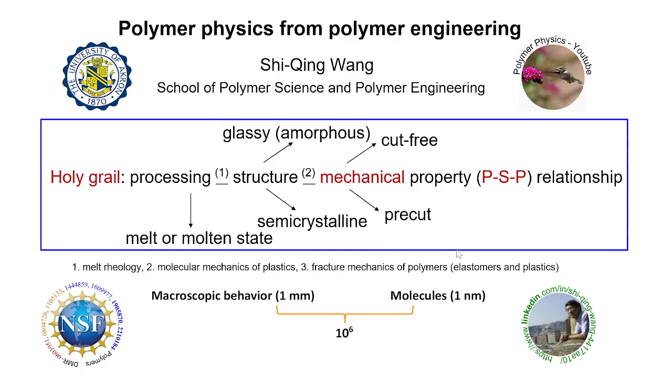Let me briefly introduce myself. We work on processing-structure-property relationships, digging out the physics to help us do better in engineering. I was lucky to work on rheology early on, to understand how we can manipulate structure and learn how ductility occurs. And I was always disappointed that I wasn't working on elastomers until about 5 years ago.

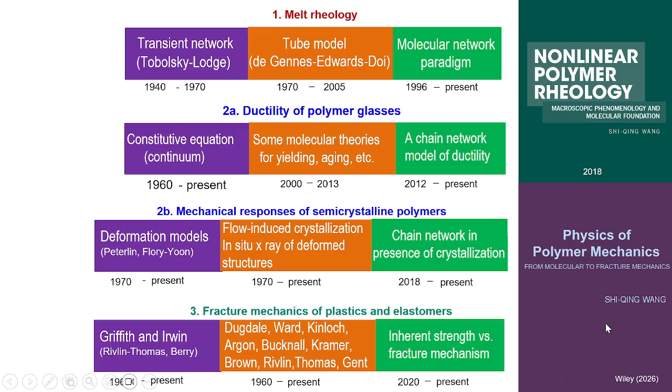We jumped into the field of fracture mechanics. This is really new for us, about 5 years old. We previously worked out how we should think differently about polymer rheology, and because of our progress on fracture mechanics, I'm writing my second book, which will essentially update many of the books that currently exist.

Very quickly, my universe is polymer physics, and there are 3 parts to it. On the rheology side, we ask some basic questions. Then we move on to the plastic state, where we also have an essential question to answer. Finally today, I'm going to share what we've been doing with the last topic, episode 3 on fracture. In particular, I'll talk about elastomeric fracture.

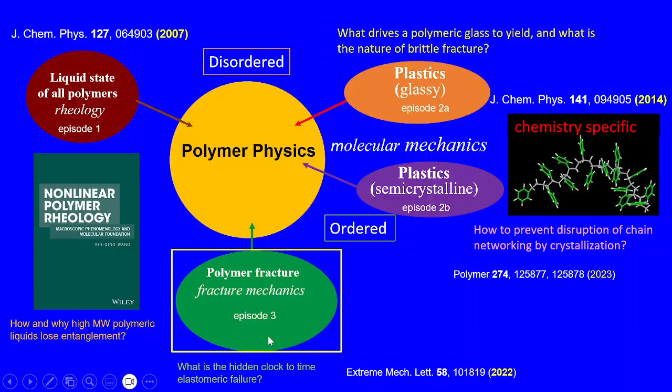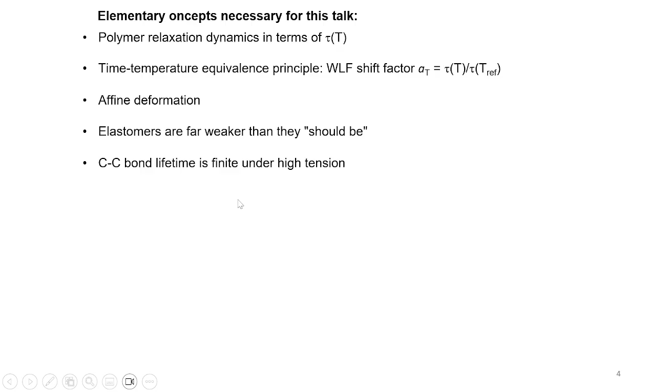But let me first review a few essential concepts. The last topic was about chemical bonds. If you look at the carbon-carbon bond, depending on the tension in the bond, there are certain lifetimes associated with it. For example, it will take 30,000 years if the tension in the bond is about 1.5 nanonewtons, so it's still too long for us.

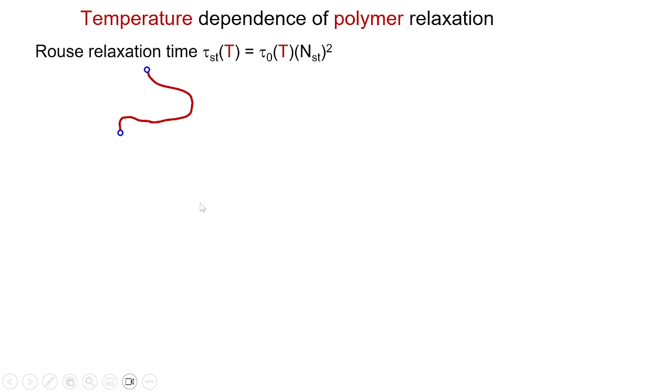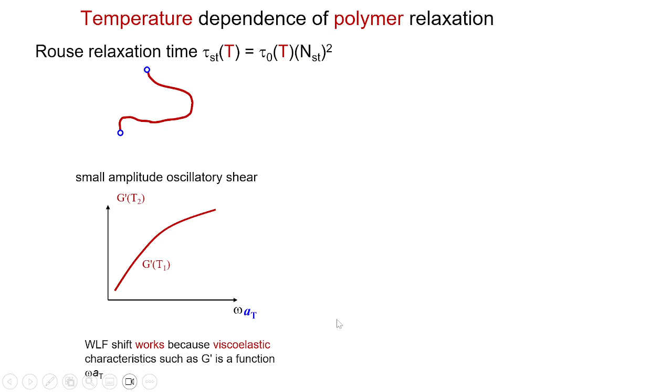Or rather, your wear problem involves higher tension, so it takes seconds or whatnot. In any case, we know what relaxation means, and we know how to think about its temperature dependence. For example, we can do oscillatory shear, make a measurement, do the shift, and realize how relaxation changes with temperature. That's something very elementary we know.

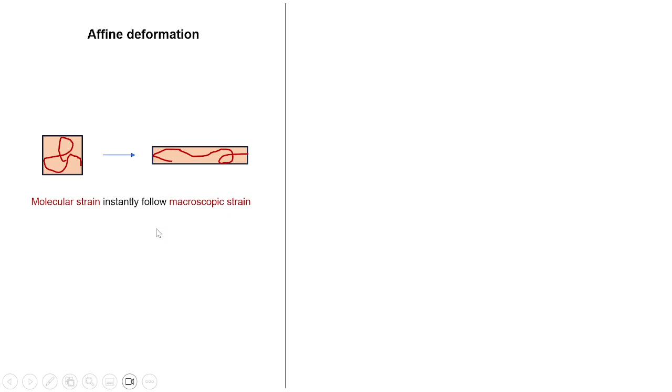I should mention we should believe that affine deformation in elastomers works very well, so molecular strain follows what you do externally or macroscopically. The bad news for all of us is you can estimate the theoretical strength of the elastomer and find it should be much stronger—about 100 times stronger than what you normally see in the lab.

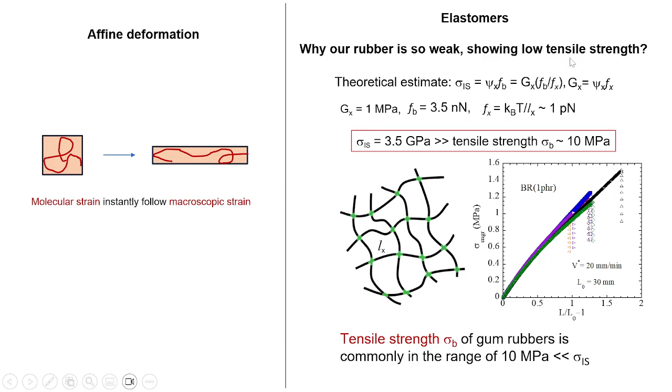That's a disappointment, and everyone is currently trying to figure out why this is the case. But that's reality, so the question is why it's so weak. Today I'm trying to give you a sense of what I'm trying to do in answering questions about the science behind fracture mechanics, what steps or missteps we've taken that we should recognize, and what would be good questions to ask in this area.

So here's the outline. I'll start with a gentle introduction to what fracture mechanics is. Once you know that, you'll probably know more than most people about this, because fracture mechanics is something I even shied away from 5 years ago. Then I'll briefly say a word about the essence of polymer fracture—2 slides. Interestingly, we have an old way of thinking about it, whereas the newer way is even older. It's a funny thing I want to emphasize.

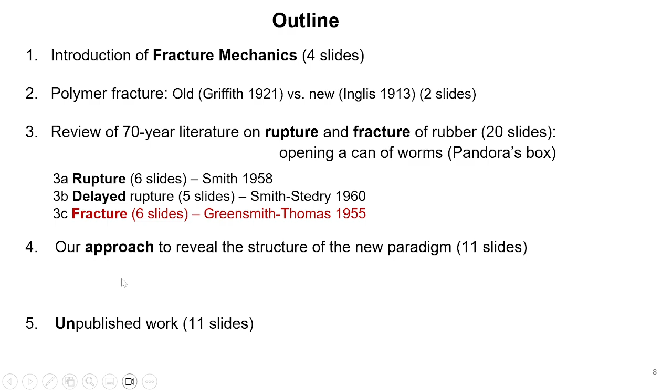Now I'll spend a lot of time reviewing what has been done in the last 70 years. There are 3 topics: rupture, delayed rupture, and fracture. Then I'll talk about our approach to it. In particular, our approach discovered that the toughness is largely determined by the strength you have in the system.

Moreover, there is a lifetime, an internal clock that governs this whole process, which has to do with the lifetime of your elastomers—how strong or how long your carbon-carbon bonds can survive under high stretching. That's a completely new concept, ignored in the past.

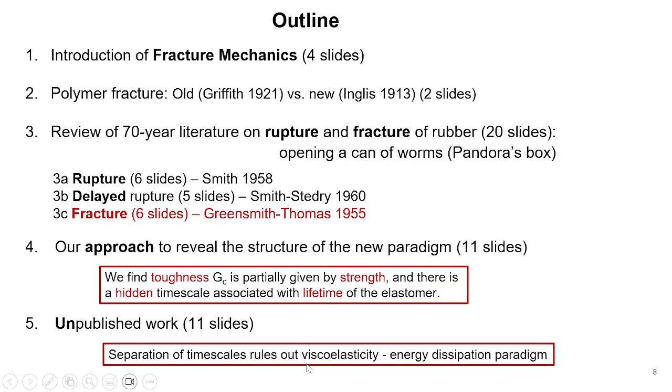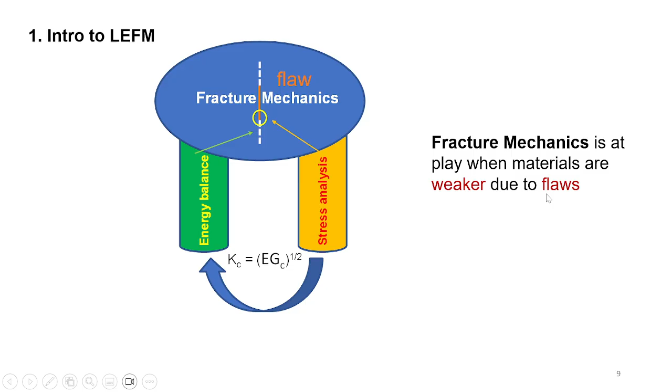And then lastly, if I have time, by looking at a variety of experiments, I'll show how we can go beyond the previous paradigm. In fracture mechanics, it turns out you worry about it only if there are flaws in your system. It all started long ago when we worried about window glass—we find window glass is so weak compared to what's theoretically possible.

And that bothers all of us—weak by 2 orders of magnitude. So fortunately, there are people who already started worrying about it.

If you dig a hole, a through-thickness hole in your material, you find the stress at the 2 corners, the tips, can be much higher than the remote load or overall load. So that's a good starting point, except if you look at it, when this hole or this flaw is infinitely sharp, the stress will be infinitely high at the tip, which is annoying.

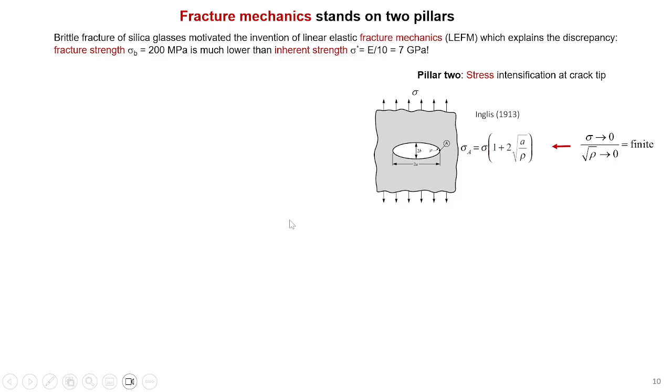And Griffith, for reasons I'd need to wake him up from the grave to ask—gee, why does that bother him? It really bothers him. So he decided to work on the effect of having the condition for a flaw that you can pretend exists by digging a hole, and under what condition this flaw will lead to crack growth.

So he worked out an energy argument to indicate that it happens when the so-called energy release rate is higher than surface tension. And there's more work on this side later on, when you consider a very sharp crack, you also find that the stress diverges as 1 over square root of R.

So as you approach the tip, it goes to infinity. And what regulates the strength is the so-called K, which depends on the so-called far field load.

So these are all simple mathematical results. What bothers them is the divergence. So Irwin comes in and says, oh no, no sample can go to infinity when the stress is infinite. Therefore, there must be some way to cut it off.

So I will not go into that detail, except you recognize there are 2 pillars. One is to emphasize the stress can build up through the far field load, K. The other one is the condition for the crack to occur, by looking at how the energy can accumulate and be released to pay for the surface tension you create.

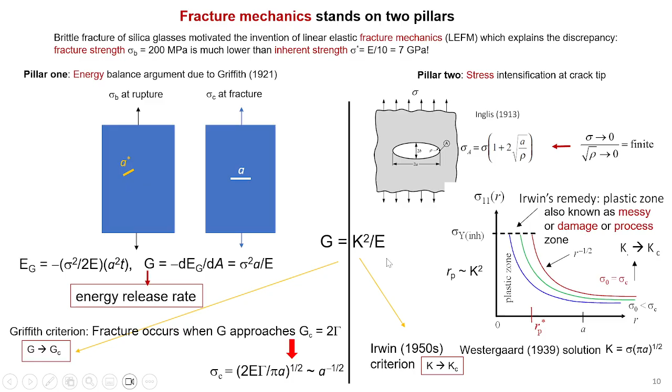I'm going to skip much of what I have to say here because I have very limited time. But basically, when you learn fracture mechanics, there are tons of questions that show up. I'm not even going to go through every one, except what I learned—I'm troubled by the fact that there seems to be a confusion about equating cause and effect. They are not equivalent, okay?

There are many other questions that I'm listing. The beauty of having a recording is, here it is—you can show it later if I don't have the time. But in any case, I was very bothered by this.

I just showed you the 2 pillars. There is a sense that these 2 pillars are equivalent. But from day one, the way I read it, they are not equivalent—they are causally related. The stress is determining everything that's happening. This energy is what is associated with the stress.

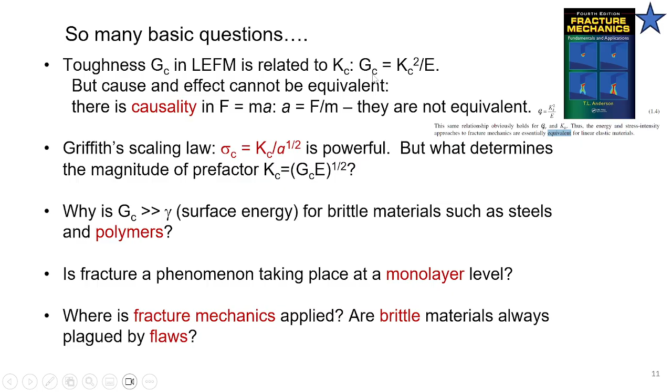So let's take the most remarkable case. When you have a sample that you know has no flaw in it, it turns out you just need to describe its tensile strength and how much you can stretch it.

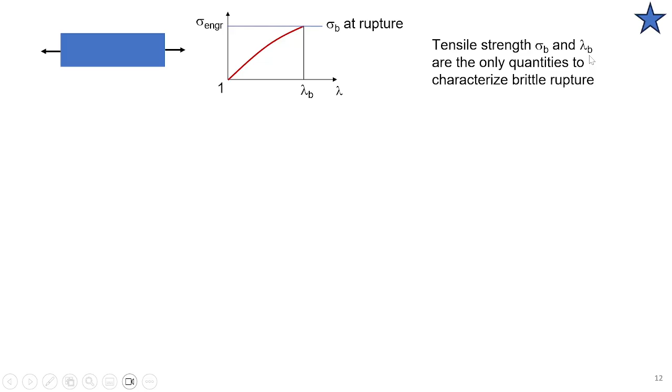But that's not how we think about rubber for the last 70 years. We thought rubber is weaker—remember I said it's weaker by 2 orders of magnitude. One of the things in our mind is it's weaker because there are flaws. But if there are flaws, then indeed it's not sufficient to just characterize your material in terms of stress, and you have to introduce a length scale, okay?

And that's what Griffith did. So Griffith's discovery of the energy release rate precisely says there is a quantity that controls fracture, and it involves both the strength and the size of the crack.

So 100 years of practice is: we suspect there's a flaw. Well, if there's a flaw—and I don't know the size of it—why don't I just do one where I know the size, and learn what the flaw is doing? And then you feed that back to the system.

The problem I learned again 5 years ago about this fracture mechanics is Griffith was able to tell you, hey, I can tell you what happens when fracture occurs. It occurs when this number reaches some value, which implies that the critical stress is—if this is a constant—then you flip it, it's 1 over square root of A.

I call this an operational definition. This formula does not give us any sense about the magnitude of GC.

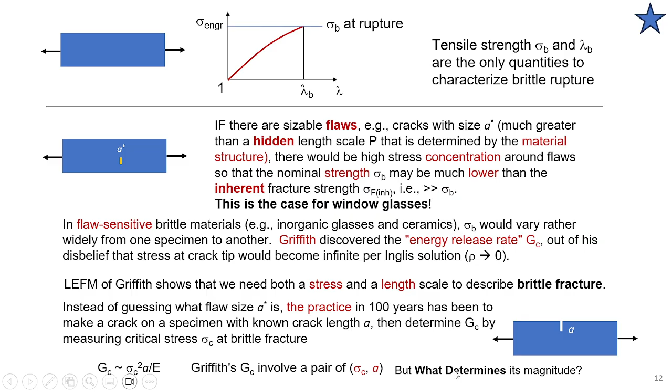Let me briefly review what happens with fracture of polymers. We suspect our polymer is flawed. As anyone doing fracture mechanics would, we make a cut and examine at what stress the crack will propagate. Indeed, you'll find the stress needed for propagation depends on the crack size—it's 1 over A square root.

If you make a plot, you find that using a larger crack causes propagation to occur at a lower load. People were patient enough to use smaller and smaller cuts, and eventually found a value where, once the cut is small enough, the material is as strong as without any intentional cut.

If you are patient, you'll realize that as my equation on the left goes to the minimum cut size, it becomes the tensile strength. If you work out the detail, you'll find this means I can write Kc in a different way.

In the textbook, if you analyze this simple math, you'd conclude the reason there's a minimum cut size is because it matches the flaw size. But it turns out that conclusion is highly problematic—the meaning of this minimum cut size has a different origin.

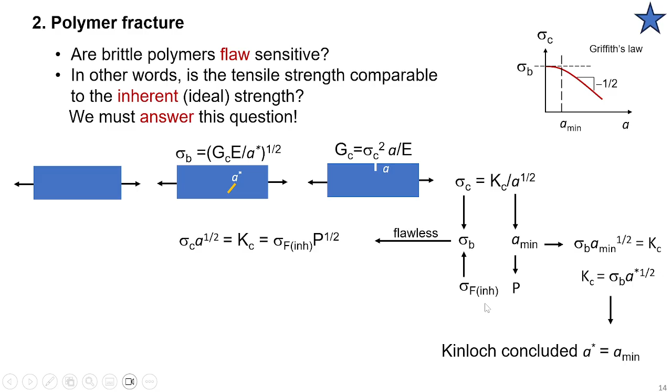I'm trying not to go into details, but there's later analysis you can look at. You'll find that the existence of this minimum size is actually related to how sharp that crack is.

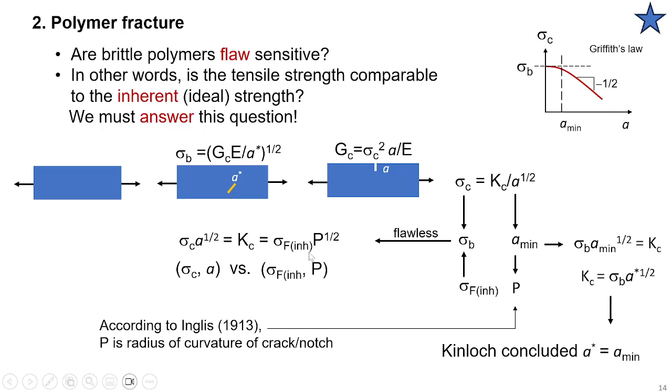If you do that, you can start to answer the question. Kc, in the operational way, you don't know its magnitude. But through this analysis, you find Kc is actually determined by the strength of the material and the sharpness of the crack.

I would probably skip most of it. This is why I said in earlier days, we know this insight much better than Griffith was able to. If you've spent enough time on this simple solution, you imagine keeping loading the sample until the tip reaches the strength—that's when breaking occurs.

On the left, you'll find a relationship between Kc and the strength of the material. So what we tried to achieve, and did achieve in the last few years, is discovering that Kc and Gc—operational definitions that are useless for teaching us their magnitude—actually have an alternative expression in terms of material properties: the strength of your rubber, and how sharp the crack naturally evolved to be.

Let me now quickly, with that background—I know it's still rather abstract—jump to the third topic: reviewing the literature. The literature is very rich, 70 years of continuous research, since the 1950s.

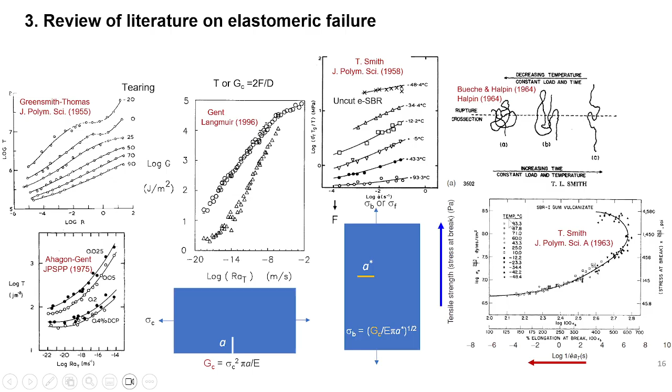Similarly, you find the tensile strength grows with rate and grows as you go to lower temperature. There's a whole set of data, which I'll go into more detail on later. People even made a master curve—this plot shows strength as a function of 1 over the rate, so the higher the rate, the higher the strength. There were some early explanations for this, which I'll criticize. In any case, there were data showing this, and they even made a 3-dimensional plot showing temperature dependence and rate dependence.

Let me go into more detail and talk about this topic that most fracture mechanics people avoid, which is rupture without a cut. If you don't have a cut, that's not a fracture mechanical setup anymore, except they blame everything in terms of mechanical response on fracture mechanics, because they visualize flaws in the system.

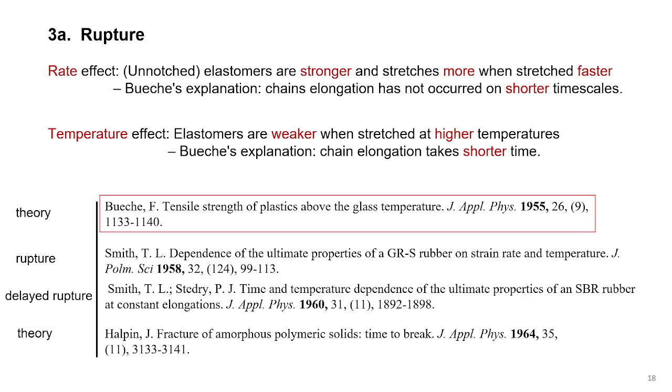Let me tell you what intrigued me, which has been known for almost 70 years. If you stretch faster, the rupture will occur at higher strength and higher tensile strain. If you go to lower temperature, you'll find your material is stronger. These are the two effects I verbalized, and there were even some theories trying to explain that, which I will criticize soon. These are the key papers, from 1958 and 1960.

Here's the actual data, just showing what I told you. You can imagine a rupture problem. It was known since the 1960s that if you use a low rate, it will rupture here; higher rate, rupture here; even higher rate, ruptures there. If you plot these three points as a function of rate, you get this line.

The higher the rate, the stronger it is. And the lower the temperature, the stronger it gets. So this is a lower temperature, this is a higher temperature. This has been known for nearly 70 years.

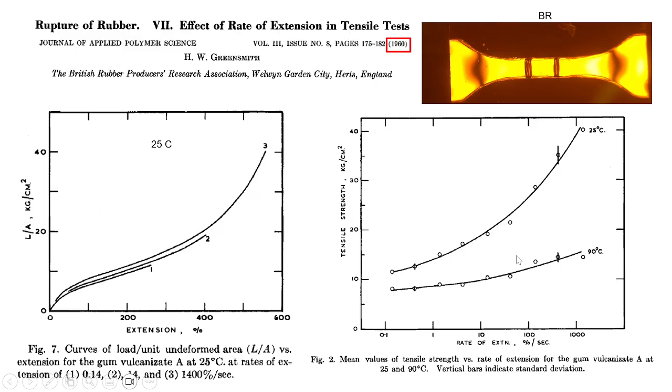How to explain it? I'll give you two literature explanations. The first one is due to Bueche and Halpin. Bueche was a very famous professor, eventually at Akron. He was confused about what a creep experiment was teaching him.

Basically, he grabbed a piece of sample, used constant force, and found that given enough time it creeped to a point and then rupture occurred. I replotted his data here. From that he concluded something completely erroneous: he says, oh, I understand what the rate effect is — if you use a higher rate, the time you use is so little that the chain has no time to become elongated yet.

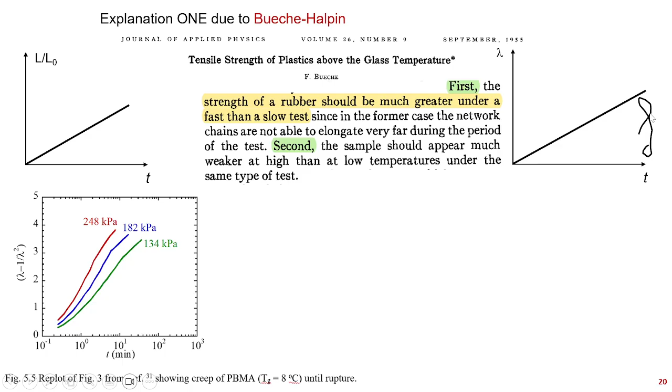So let me teach you how this goes. Imagine I'm doing macroscopic stretching on this side — this is your molecular strain. I'm just talking about affine deformation. As I stretch to this point, my molecules get stretched this much. If I use a higher rate, he basically says it takes less time, so my chains are not as stretched yet — you need to wait to get stretched.

So therefore, you can essentially avoid being broken, because at that time the stretching hasn't occurred yet — sufficient stretching hasn't occurred yet. This is his explanation for why higher rate is stronger: at higher rate, relative to a lower rate, you haven't spent enough time, and therefore the chain hasn't stretched.

This goes along with further papers claiming — which is the key mistake we accepted for 70 years — that your rubber spends most of the time reaching the critical molecular strain, and spends very little time at the critical strain for chain scission to occur. That's the claim.

That claim, of course, completely violates the reality of affine deformation, which is why I reviewed for you what affine deformation is. Your experiment was not a creep experiment — you do a displacement experiment. Once you reach that strain, you already have that molecular strain.

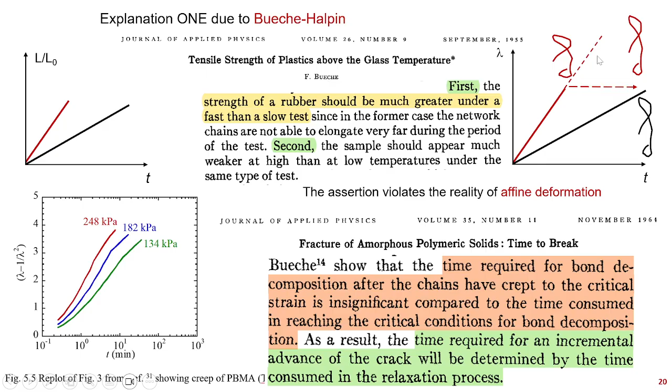Let me give you the second explanation. This problem, seemingly non-fracture-mechanical, is treated as a fracture mechanical problem because there's a flaw in there. So they try to explain this rate dependence through a separate experiment with a cut, where you learn about the relationship between energy release rate and the rate of crack propagation. I won't go much further, except to say this is really too difficult, because there's no relationship between the crack propagation of a pre-notched sample and the rate used to stretch an unnotched sample.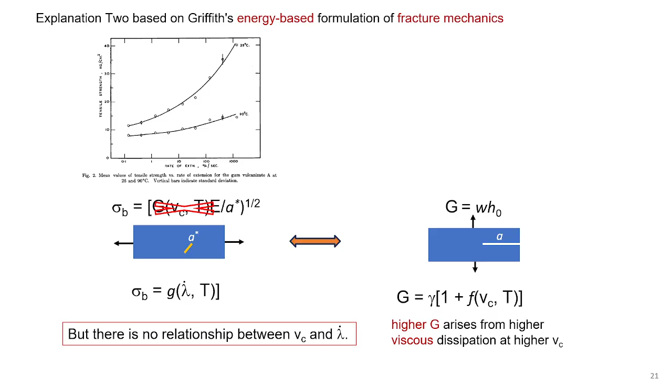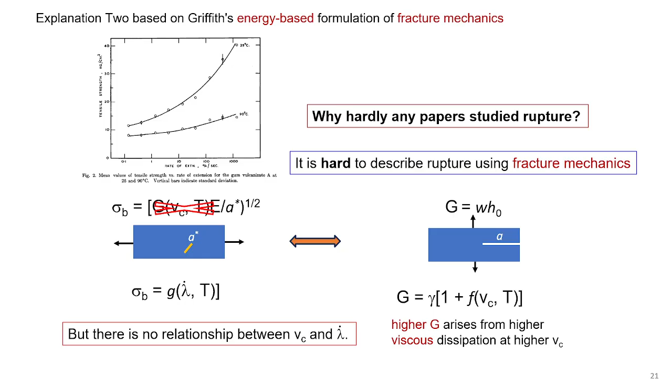So this is a good reason why hardly any papers study rupture — we really run into this difficulty. In fact, I probe my colleagues all the time, I force them to explain rupture, and they really give up, saying 'I'm not touching rupture.' Rupture is difficult to deal with, and in my view it's clear that it's really difficult to use fracture mechanics to describe rupture.

Further, it turns out people collected lots of this data — I'm re-showing it here — and they find the strength changes with rate, and at different temperatures it gets stronger.

And they said, oh, that's in the 50s. WLF was just discovered, so let's do a temperature superposition. Let's shift them. They find if you use WLF, you get a curve almost like a master curve. That's published in all the literature.

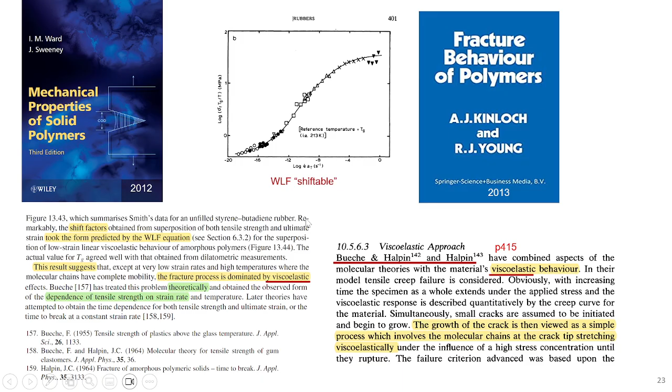Except if you look a little carefully, if you try to really produce a master curve, you find you need a shift that's different than WLF. That's the red shift. It gives you a much better master curve, and it suggests that the temperature dependence is rather different than WLF. So I'm just trying to show you that the whole literature talks about rupture in terms of temperature dependence through WLF.

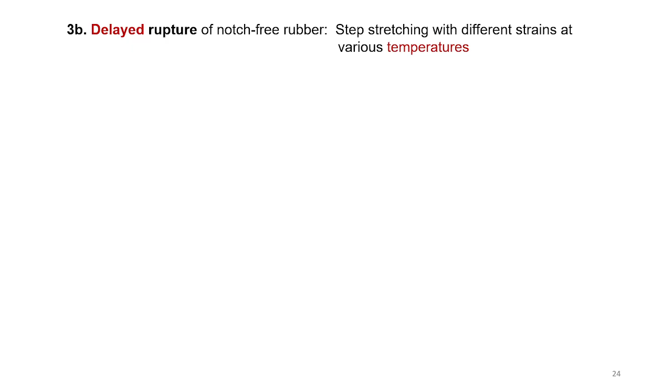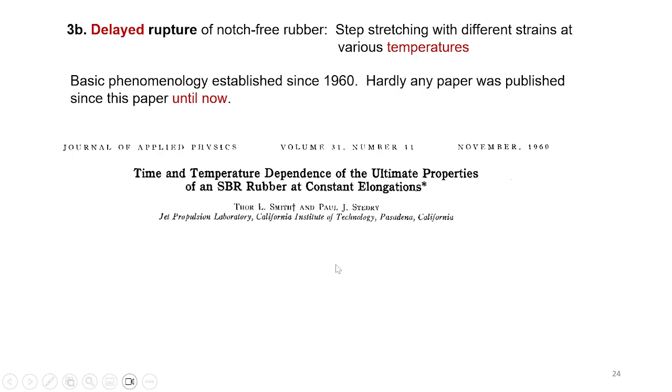The most important experiment, in my opinion, is this delayed rupture experiment. The same Smith did this, and it was hardly ever repeated. Nobody ever paid attention to this experiment. I want to say, to the degree that this book does not even cite this paper, it's pretty remarkable. So let me try to say what that experiment was, published in 1960.

You stretch a rubber to a certain degree, you hold, and wait. Lo and behold, it will break. You stretch it a little more and hold, it takes less time to break. You stretch it the same degree, but at a lower temperature, and it takes longer time to break. So he did all sets of the state, okay?

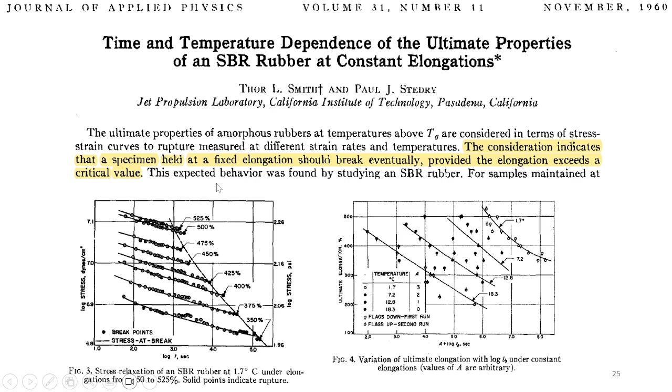And he even remarkably anticipated this result after he had done the continuous experiment. So I scratch my head, really trying to get into his mind about how he even could anticipate that holding a stretched piece of rubber would make it break.

And the explanation is the same. You stretch it. If you do a so-called delayed rupture, which usually means you stretch very fast and hold it. After you stretch it, you hold it. There's no further deformation. Nothing further going on. This is the most beautiful experiment because there's no ongoing deformation.

And then if you wait enough time, he waited as long as 7 days. If you don't stretch enough, well, he was very patient, a patient man. So it could be seconds or could be 7 days, depending on how much you stretch and hold, and depending on temperature as well.

So the idea I'm putting into his mouth: if you stretch, the black line is the continuous stretching, until at some point it stretches there and breaks. If you all of a sudden stretch to the same level, his idea is the chain hasn't reached the critical strain, so it will take time to elongate, and you wait until it elongates. Because most of the time was consumed elongating, reaching the molecular strength, rather than waiting for the bond to break. So my view is exactly the opposite.

That's why he thinks this way, so look, this is written in the paper. I'll paraphrase it: basically it says the system takes most of the time trying to get molecularly stretched, rather than taking time at that stretching to break. And I have evidence to prove exactly the opposite.

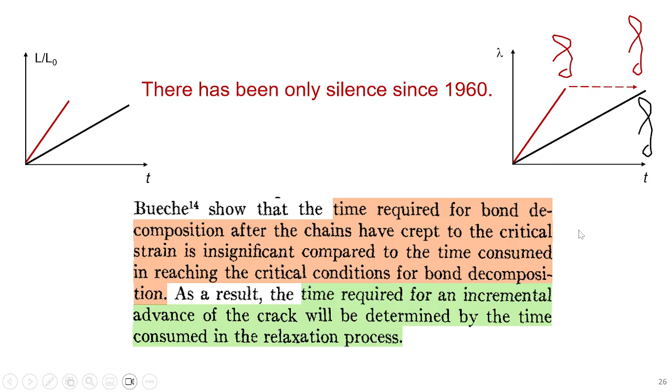So this is really beyond me. No paper ever repeated this. How to comprehend this? Maybe they didn't figure out this is the reason. In any case, the same paper speaks about nothing else. The last point says the temperature-dependent rupture has no significance. Basically, they are aware the chain can break, except they are also insisting that chain breaking is not the dictating process. The system is mostly spending time reaching the stretching, which is a big violation of what affine deformation is, which actually is quite accurate.

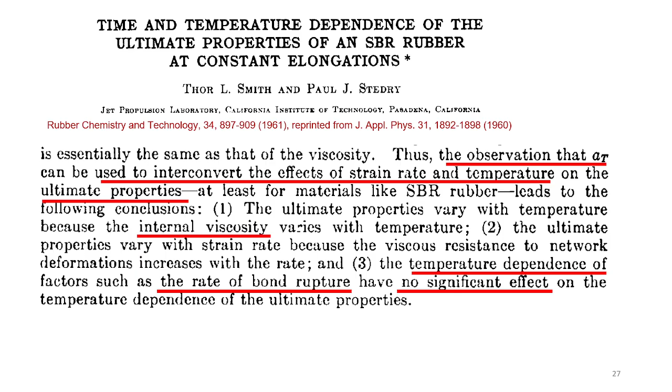I will have experimental proof for you. In any case, this is the same paper. He did it for different temperatures, so he could claim there is a temperature dependence of this phenomenon. For example, at lower temperature, it takes longer time because polymer relaxation is longer. So WLF will give you that fit. He fit them, this is the fit. And look, oh, reasonably it fits quite well.

What I mean is the fit, the red is the WLF fit, and the symbols are the data. Except if you properly shift this data vertically, you find they systematically deviate. So let me repeat, it's the same data. You just need to look at them, and then you realize something is wrong.

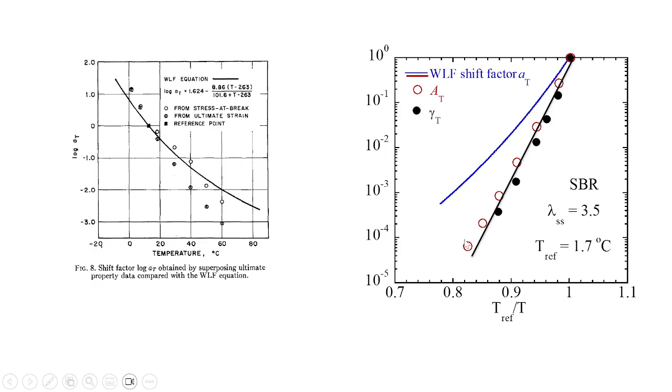Now let me talk about the third one. Now it comes to the world of fracture, which usually you mimic that process by doing a tear experiment. The tearing experiment really obscures causality. People thought that how much force is arising is produced by how fast you stretch.

Same thing, it turns out the higher the rate you stretch, the faster the resistance. We can talk privately, but this is a big deal that I claim this experiment was confusing the causality.

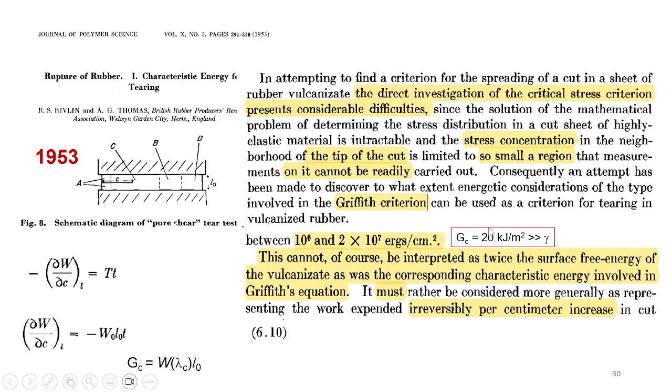So I can review for you in the beginning, that's the first paper. Rivlin teaches us that we should use a pure shear, except they find that this energy release rate is much higher than surface fracture energy. I'm just flashing this result again and again, showing you that the so-called energy release rate is higher as you tear faster, and higher as you go to lower temperature.

All this is summarized in terms of this expression, suggesting there is an additional contribution coming from tearing faster. Because this G is much higher than gamma, this second term is much larger, which is monotonically changing with the rate, and follows WLF. So this suggests that this is all viscoelastic and viscous dissipation, in fact.

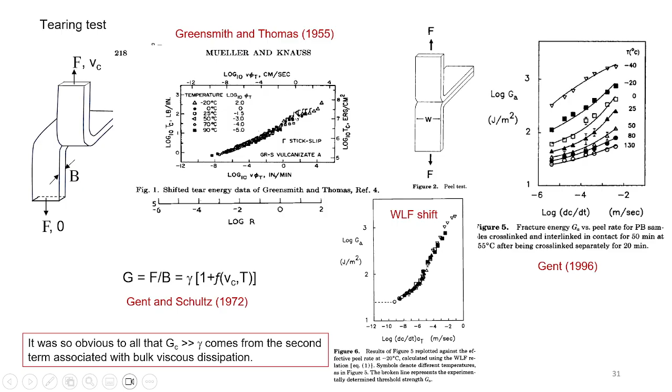So this is the WLF shift here. There's just tons of work like this. So this is the shift—they shift it and get this so-called quasi-master curve through WLF.

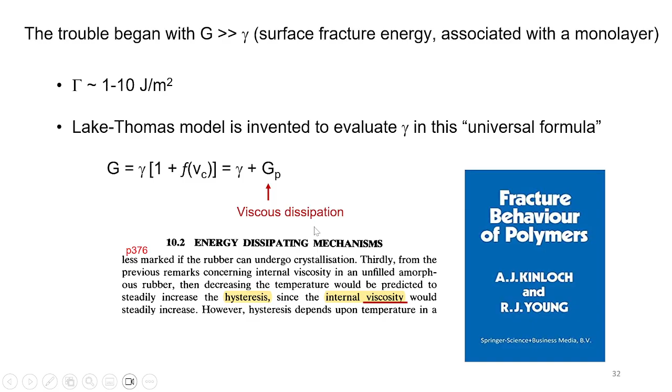And therefore, its origin is viscous dissipation. So that's the current paradigm, reviewed and discussed in our textbooks.

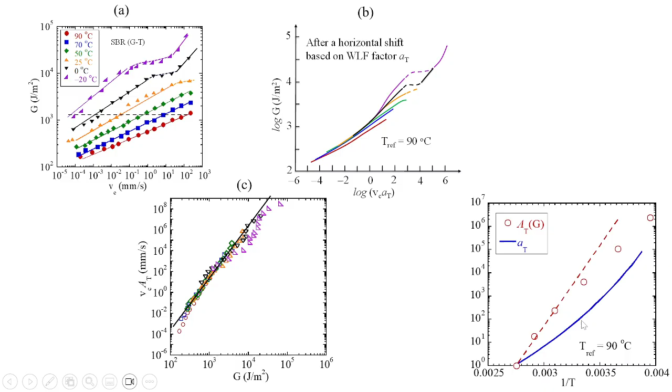So you can look at this a little closer, the very same data. You do WLF shift, that's how you get it. But if you do it a little more carefully, as I did, you find the shift is the circles and WLF is the blue line. They are not the same.

That was just a minor point for me. Is this for a filled rubber or unfilled? Everything I say is gum rubber, so it's all unfilled at this point.

In fact, there are theoretical attempts trying to compute what this term is by relating it to the rate of crack propagation. Since you have to think about dissipation, you need to convert this velocity into a rate. In converting that, you must introduce a length scale. The only length scale they can introduce is an unphysically small one.

But people are happy, you can fit the data. So they imagine that this crack propagation involves a length scale of 15 nanometers.

Okay, so let me summarize now. One more time: we blame this so-called crack speed dependent term on viscous contributions.

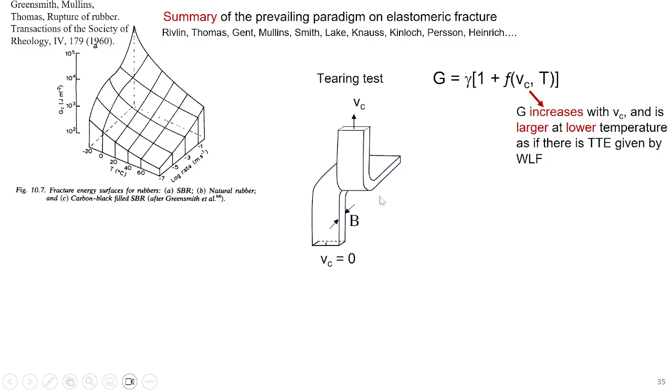As I said, people even computed how this term depends on the rate by assuming a certain unknown length scale. That's the paper by someone named Knauss, from Caltech.

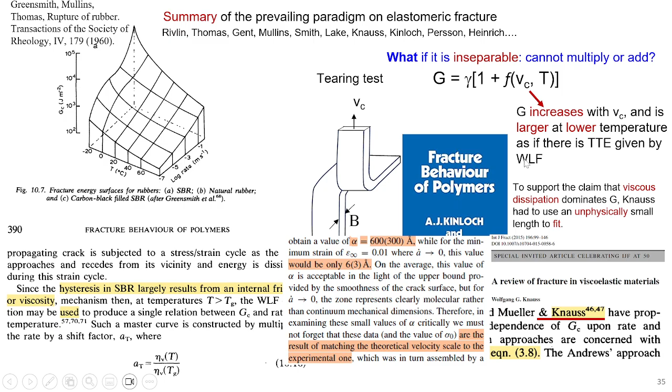The question really is, what if your physics is such that you cannot write anything in a separable way—you cannot multiply, you cannot add? In any case, this is my last slide about how they concluded.

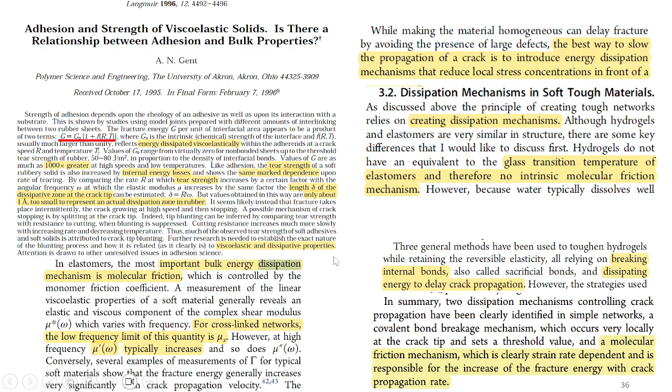Same thing, 1 angstrom is involved, and this is all in the framework of calling this energy dissipation. Okay, so that's it. Now comes to what we look at, how we look at it.

I have 10 minutes, that's enough, because lots of things are in our publications that I will mention. So basically, do we have flaws? We can—this is the same.

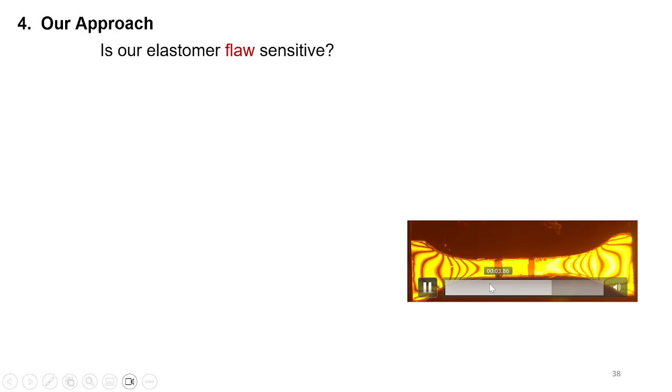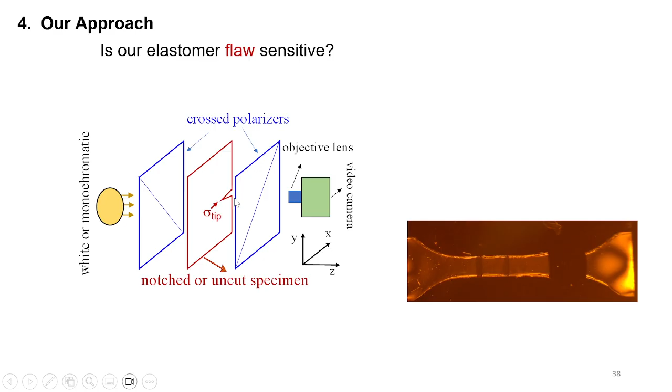So basically, do we have flaws, and how do we know we have a flaw or not? We decided to look at the tip directly, look at the stress at the tip, and even compare that stress at the tip with the tensile strength. Through that, we can learn about whether flaw is really the problem.

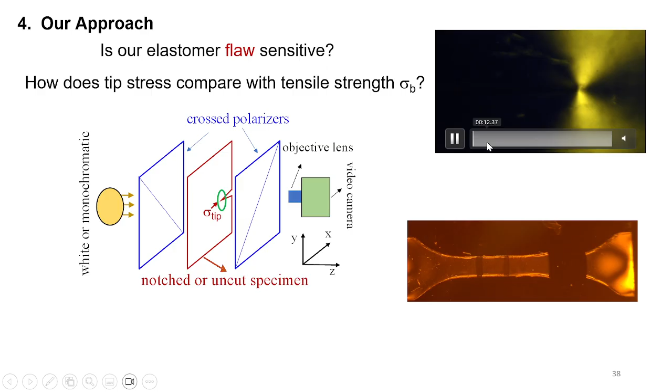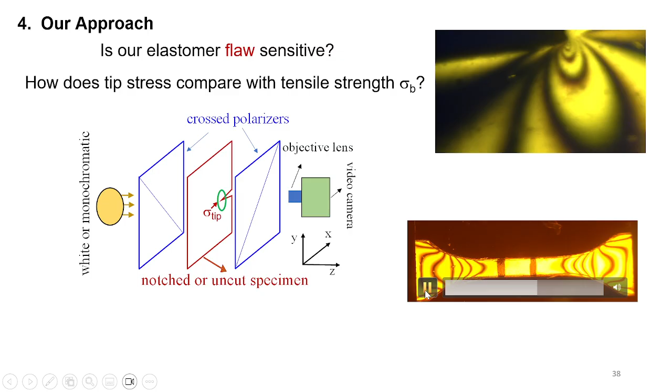Here is one where we intentionally make a flaw and stretch it. It turns out you can patiently analyze this movie and find out, through birefringence, what is the state of stress at the tip. And start to ask the question of why, at the higher load, the crack speed is higher.

Some of the details are already published in this paper. Basically, one of the beginning efforts I had was to clarify the meaning of the Rivlin-Thomas experiment. What they find is they do a pure shear test, and they find that independent of height, the crack will start to propagate at the same G, which has the implication this is all a beautiful energy argument.

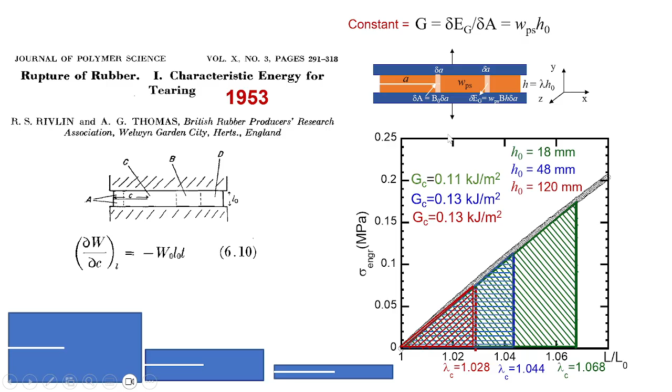I had a different insight. I judged that this occurred because when the crack occurs, the tip has reached the same stress, overcoming the strength of the material. So it turns out we can repeat this experiment using 3 different heights. We find indeed what you're supposed to see: if you load your sample with different heights to the same overall load, the tip is much more intensified when the sample is taller.

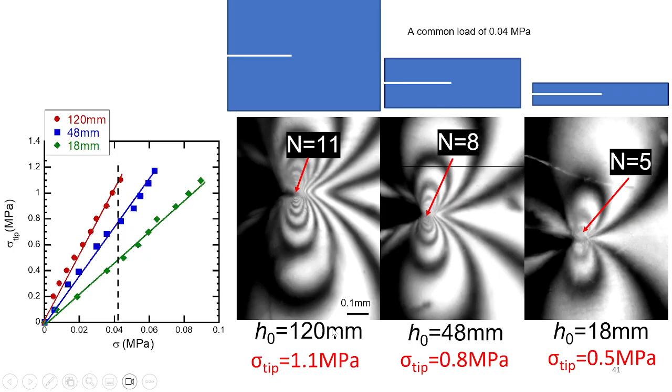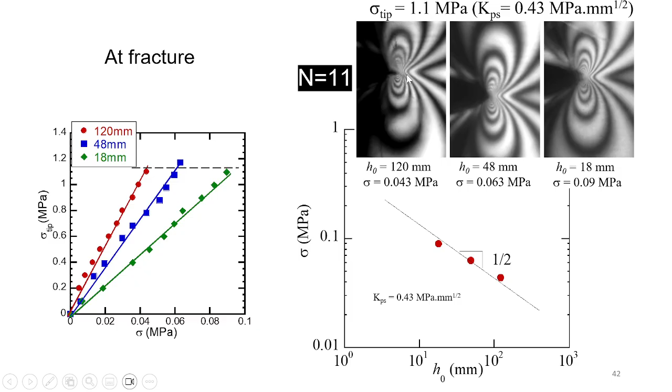Similarly, if you look at where crack propagation occurs, you find that's independent of the H you used. In other words, the higher H, it involves a smaller load. At crack propagation, the tip stress condition is the same, indicating all this is about how the stress is dictating the breakup of the network at the tip, rather than an energy argument.

The most remarkable thing out of this was you are able to find that the tip stress grows linearly with this parameter called K that I introduced initially, which basically is the far field load. So this linearity tells us the tip stress just linearly grows with far field load.

In fact, you can look at the point where crack propagation occurs and find that that point, if you regard it as the material property, this linearity actually naturally produces a length scale, which is the material property related to how the stress intensifies at the crack tip.

Through this exercise, we learned that previously we only knew K is determined operationally. Now we learned the magnitude comes from the material property, so you have a pair of quantities different from what we knew before. This is why I said from the beginning that the strength is determining your resistance to crack propagation. This is the beautiful result showing you can replace this operational definition with more insightful information about how it depends on the material properties.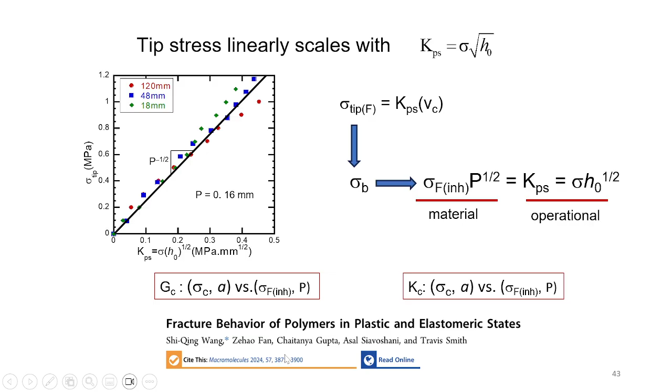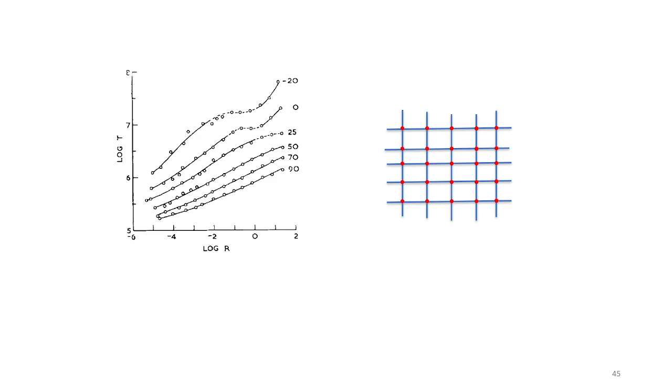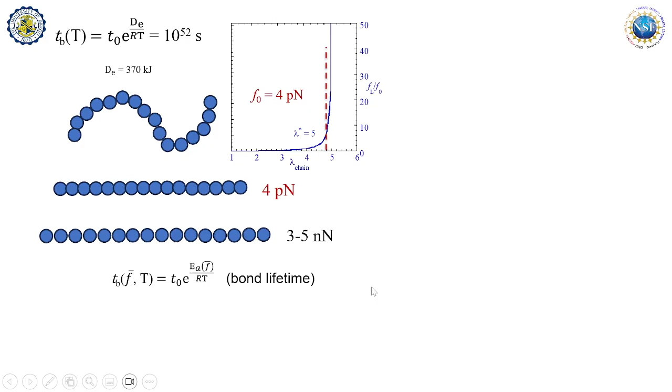In any case, I think there's without question that the problem of fracture is a transition problem. I'm going to flash through this very quickly. When the chain is stretched, you can build force, more and more force. If you don't build any force, the bond can survive longer than the known age of the universe - that's textbook. So you build enough force, and this density functional calculation shows that the lifetime of the bond just crashes down as more tension is built in the bond.

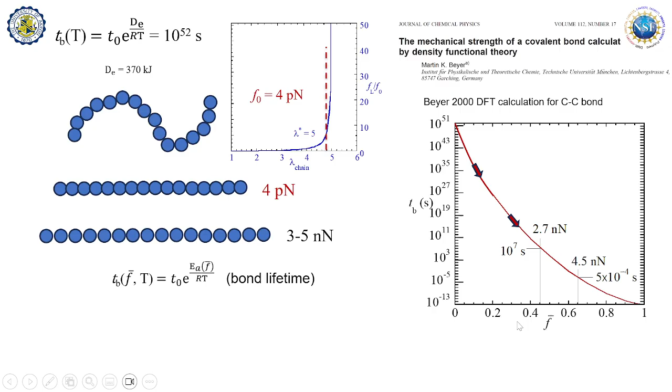Through that insight, I can build a theory that stretching is about lifetime. Your material's lifetime shortens as you stretch more and more, until that time meets the experimental time you've already spent - boom, break occurs. Through that, I could build a theoretical calculation showing how rate dependence and temperature dependence take place.

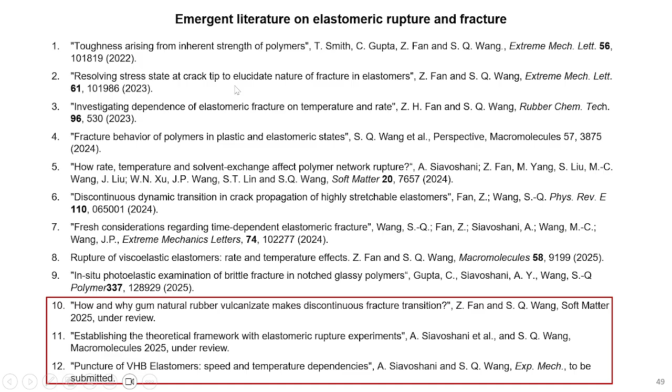So these are the papers so far, and we're writing more - these three are unpublished. If I have a few minutes, I'll show you these unpublished results, none of which have been published. I'll show you that one of the big confusions is about the rate - I'll show you evidence against Bueche and Halpin twice.

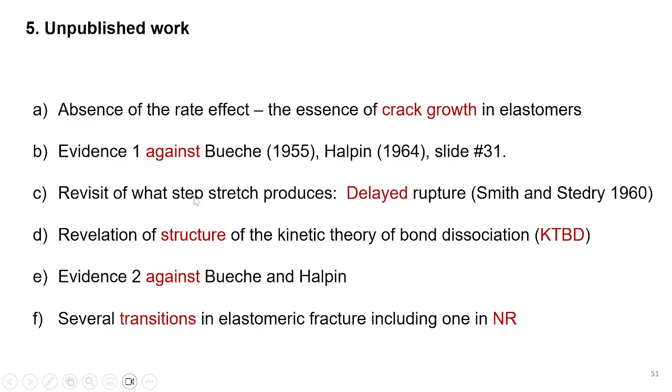One of the confusions in the literature is that they really conflated cause and effect. The tearing experiment was misinforming you about the relationship between G and Vc - G is the load, Vc is how fast you propagate. This plot should never have been plotted this way; you should always plot Vc versus G. In other words, it's the load that's determining the bond tension, and the bond tension determines the lifetime of the bond, and therefore the lifetime of the elastomer.

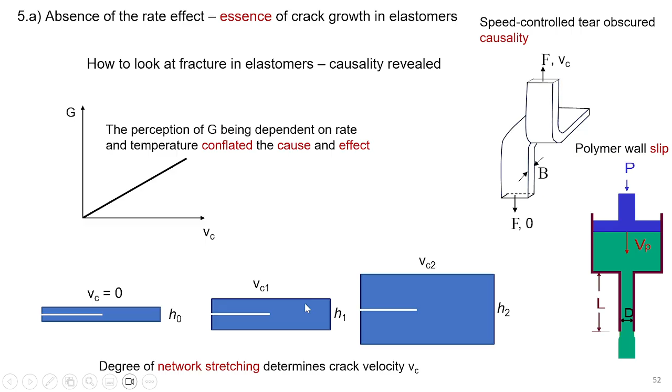So you can prove that. You can do this by simply loading them to different levels and watching the speed of the crack change with the load. This actually is a beautiful experiment.

We used 4 different rates to stretch this pure shear experiment - lowest rate versus highest rate. In the region where they reach the same strain, the speed is the same. In other words, the speed of the crack is only determined by how much you have stretched. The rate is a variable that just tells you how quickly you get there.

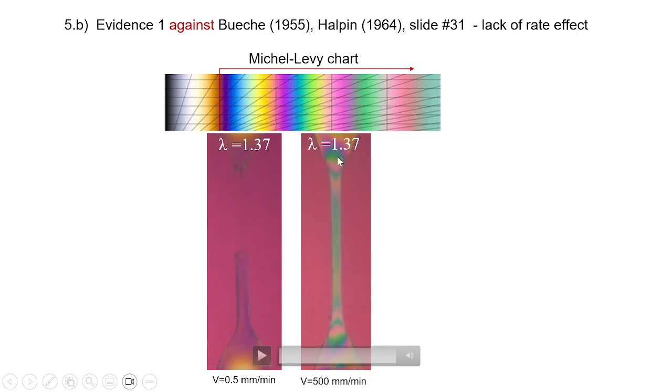So details aside, I guess I've given you the sense. Let's talk about the evidence. This is a movie taken to show the sample being stretched at two very different rates to the same level. The first one stretched slowly, it broke. The second one, because you haven't spent enough time, your network hasn't expired yet, so you can stretch more.

And this is the actual result, using 4 different rates. If you look at stretching to 1.37 for the 4 rates, they all reach the same level of birefringence, indicating the molecular strain has all been reached instantaneously because it's affine deformation.

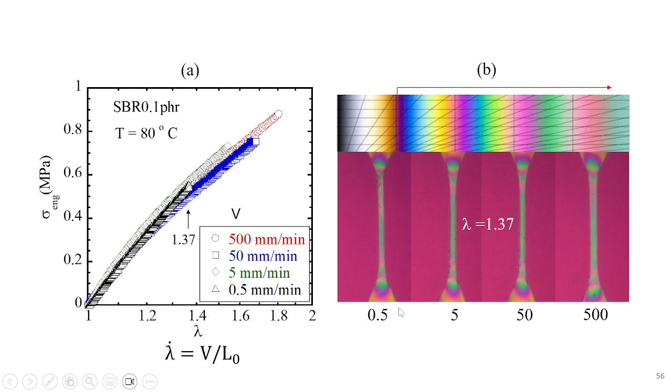And we repeat for the first time the result of Smith and Stedry about how you stretch to the same level at different strands and wait for the delayed rupture, how the temperature dependence occurs, and the dependence is very different than the WLF. This is a paper just being submitted.

So one of the last ones is to show once again this beautiful result of what is the essence of the delayed rupture. On the left, we have a continuous stretching. Let me do it one more time. On the left, we have the continuous stretching.

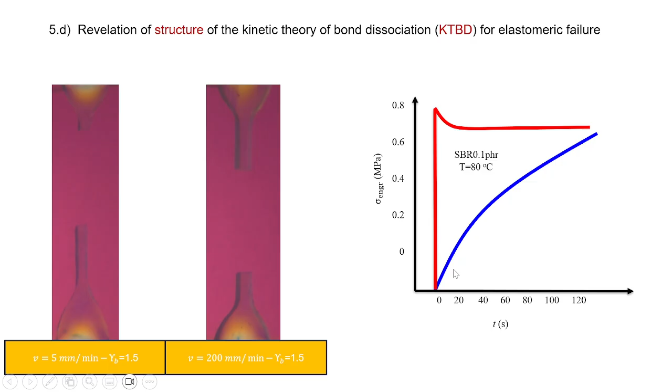That's the red. And on the right is the step strain that we did. And then the system just waits until the network expires, in the red. Whereas the continuous stretching was so slow, you already eat up all the time. And so by the time you reach the expiration, they all expired at about 100 seconds. So that actually tells you the structure of my theory.

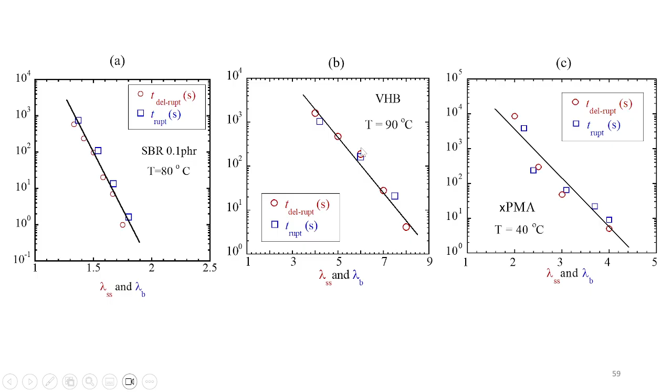I'm not going into details, but basically you can do this for different rates and find the time scale revealed by step strain waiting versus the time consumed or elapsed during continuous stretching. And similarly, the system spent most of its time just waiting for the bond to break. There's no change in the molecular strain through birefringence that we can measure.

So one of the key conclusions is the separation of time scales. In our theory, it's clear most of the time is consumed by the system waiting for the chain to break, rather than spending time to reach the molecular strain. So that's one of the key results. I wish I had more time, but I'm running out of time.

There were a couple of fascinating transitions, one of which deals with natural rubber. Natural rubber is known for a long, long time. When you change the cut size just by a few percent, it will change the strength of, or your resistance to crack propagation, in the language of energy release rate, by a lot.

So this is data. For several different rates that you did this. This is a pre-cut, and then you basically imagine using a cut size just here or just here. It sharply becomes stronger when the cut size is only a few percent smaller. And this can never be explained otherwise, and it's sharp. The sharpness - people don't ask the question of why it's so sharp.

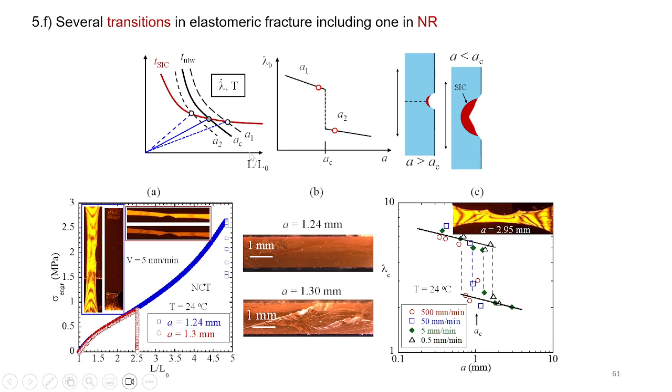And the whole explanation now finds the answer in our theory. The theory has to do with, of course, strain-induced crystallization. That takes time, and that process is competing with the lifetime of the network. So depending on whether there is a chance - the reason you are weak is because the network breaks down before the strain-induced crystallization can take place. And it occurs over a very sharp region, and I plot it here to indicate why it's so sharp, because the two meet in one place only.

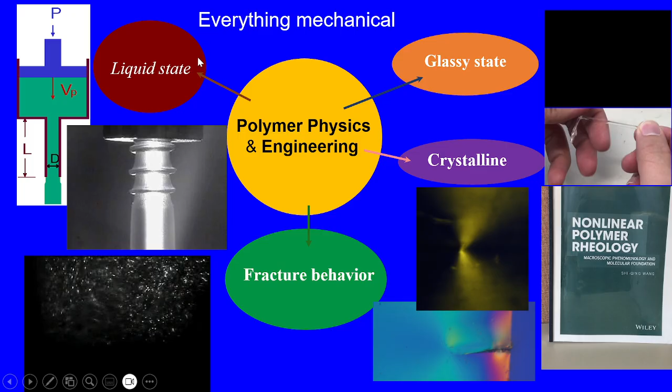So with that, I conclude. I think I'm doing okay with time, but this is the first time I'm reading my conclusions. I think it's very important to realize that this is about what happened - this is about separating of time scales, and most of the time is spent waiting for the bond to break.

And there is a lot more insight one can have by looking at the Inglis solution. And now we understand not only why Gc is constant, but we also understand what determines its magnitude. So finally, I want to say that the timekeeper in your elastomer is this network lifetime through bond breaking, not polymer relaxation time. So indeed, there were two relaxation times, two time scales, except for 70 years we've mistaken the time scale to be that of polymer relaxation rather than this lifetime through bond dissociation.

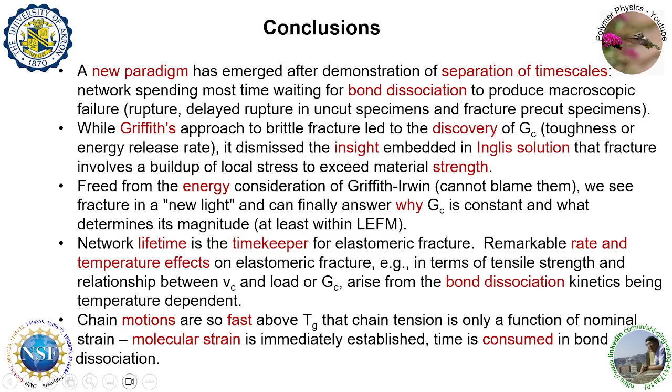In other words, the motion generally is much, much faster. Most of the time is spent, like Smith did for 7 days, because the tension is not high enough. So he waited for 7 days - boom - break. 7 days, all the molecular motions are irrelevant, as you know. But yet, they still wait. So that's the conclusion, really.